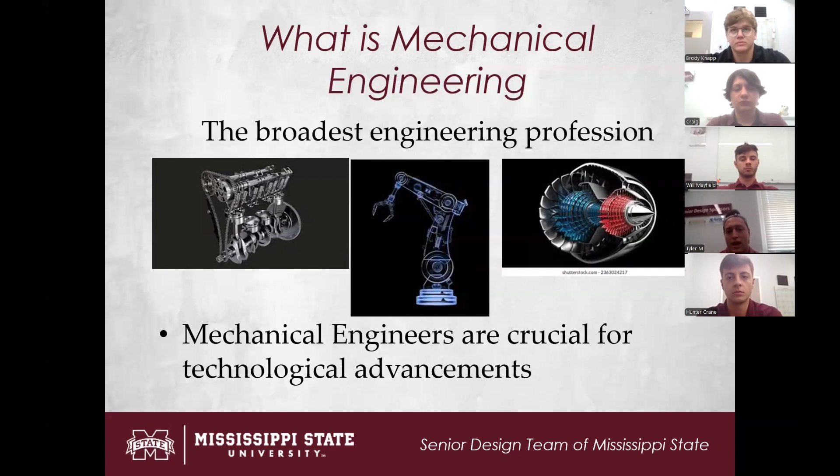So what is there to do with mechanical engineering? Specifically, it's going to focus on designing and CAD work, but there's also a lot of subcategories like manufacturing, robotics—which I know Brody told us that y'all love robotics, and that is something Mississippi State does offer. We have robotics classes available and a lab specialized for robotics. There's also testing, which is what I'm going into. We have maintenance, which is what Brody Knapp's going to be going into, and also energy systems, which my fellow Will is going to be going into.

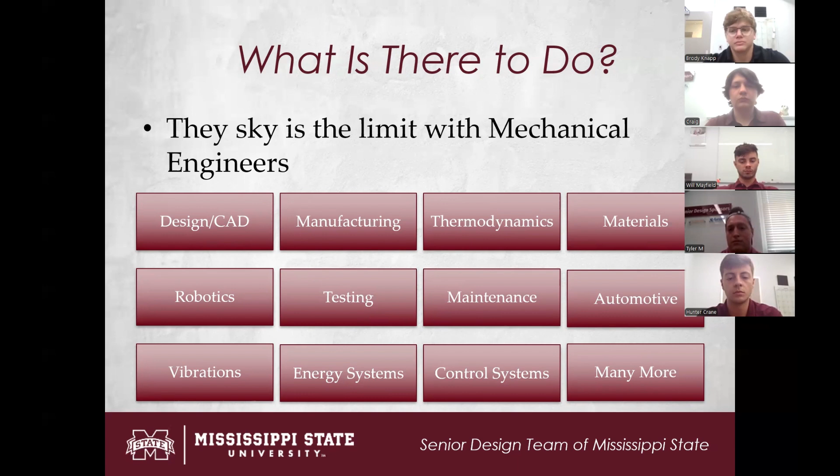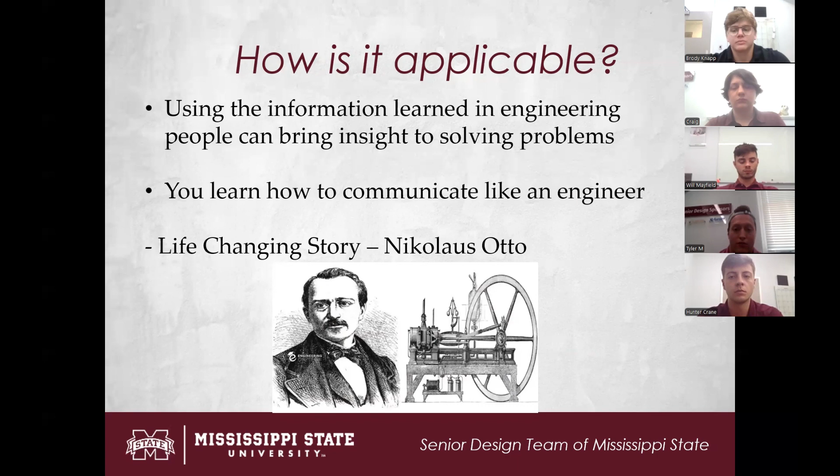How is it applicable? Well, using the information we learn in our coursework, people can bring insight into solving problems. You start to learn to communicate as an engineer and think like an engineer. A life-changing story is Nikolaus Otto, the inventor of the four-stroke Otto cycle, which is used in engines that we see in our vehicles every day.

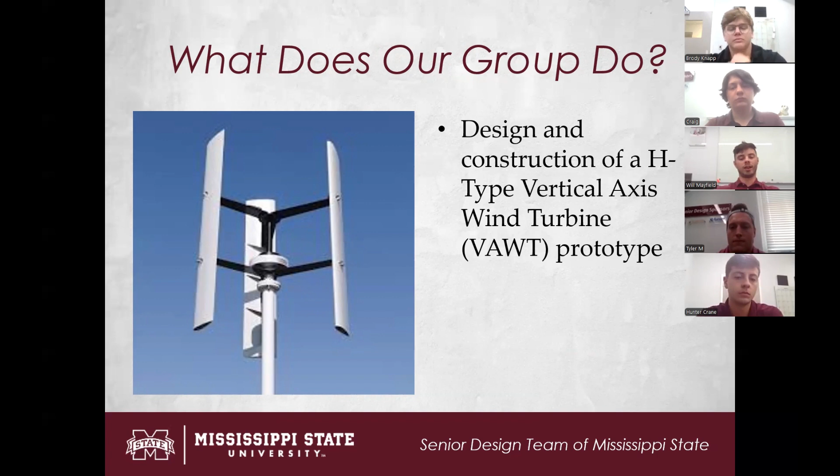So what are we doing? This semester, we were tasked with designing and constructing an H-type vertical axis wind turbine prototype. Our objectives were to build one capable of producing 300 watts of power for any given wind direction or condition. Our main goal was to determine if small-scale vertical axis wind turbine energy is a clean, reliable source.

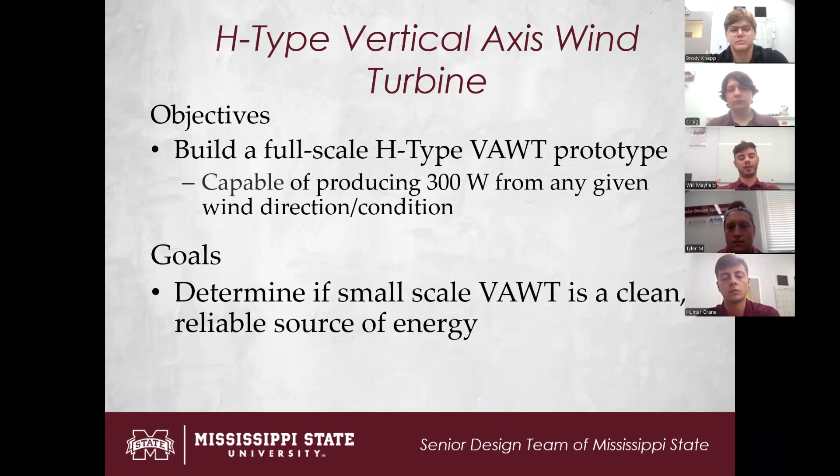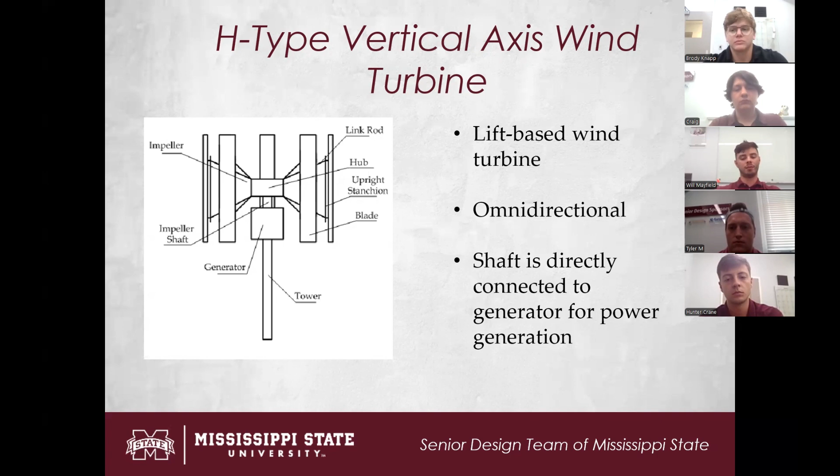So a little about our design. Our design is what's known as a lift-based wind turbine as opposed to a drag-based. These are omnidirectional, meaning they can generate power from any given wind direction. When the wind rotates the shaft due to lift forces, the shaft is directly connected to the generator for power generation.

In our case, we used a three-phase AC PMG, or permanent magnet generator, for power generation. For our airfoils, they're centered around a 6-foot long aluminum H-beam, with 10 NACA 0018 aluminum airfoil profiles secured to the H-beam using 3D printed brackets. There are also 3D printed brackets on the front and end of the airfoil so it can maintain its shape once it's wrapped in sailcloth, which you'll see in a minute.

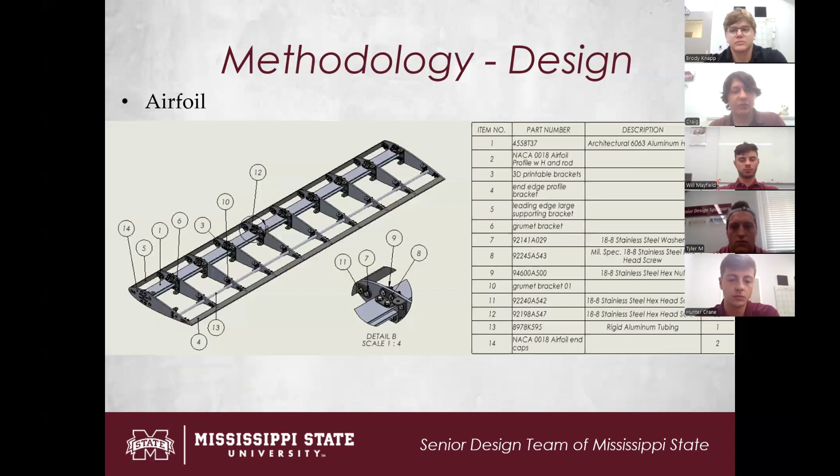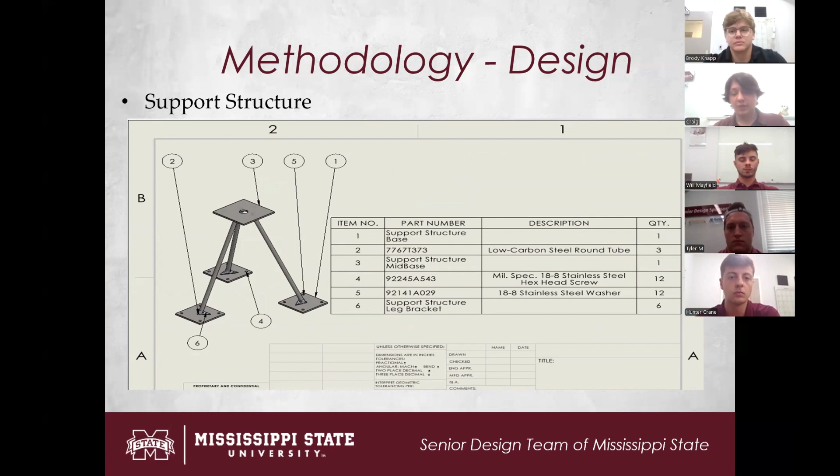For the bottom portion of the support structure, there are 3 base plates that go on the bottom, bolted to the ground through holes in the corners. There are 3 legs in a tripod configuration, angled at 70 degrees, that attach the bottom support plates to the mid base. Those legs are connected to the mid base and bottom base plates through custom brackets.

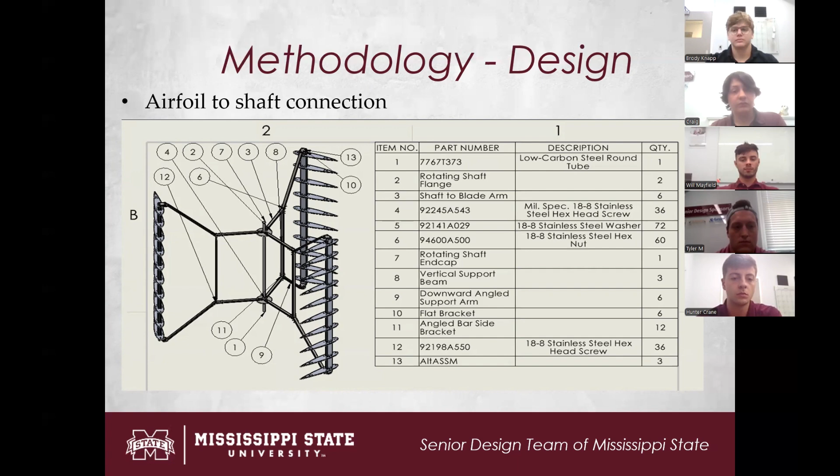For the airfoil shaft connection structure, there is a 6-foot long rotary shaft, 1-inch diameter, in the center. There are 2 circular flanges welded to that rotating shaft, and from those flanges, support arms come out at a 45-degree angle and are bolted to the top and bottom of the airfoils using custom brackets. There's also the bearing housing that the rotary shaft goes through, connected using clamping shaft collars. Inside that bearing housing are radial and thrust bearings, so our shaft can rotate freely without vibrations.

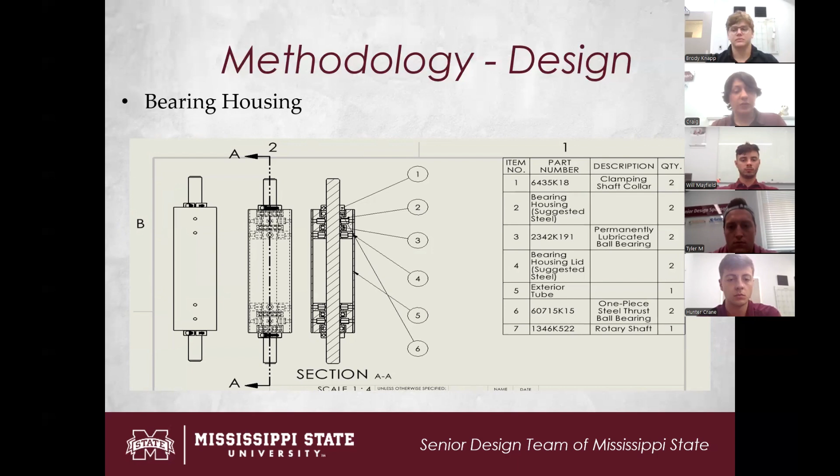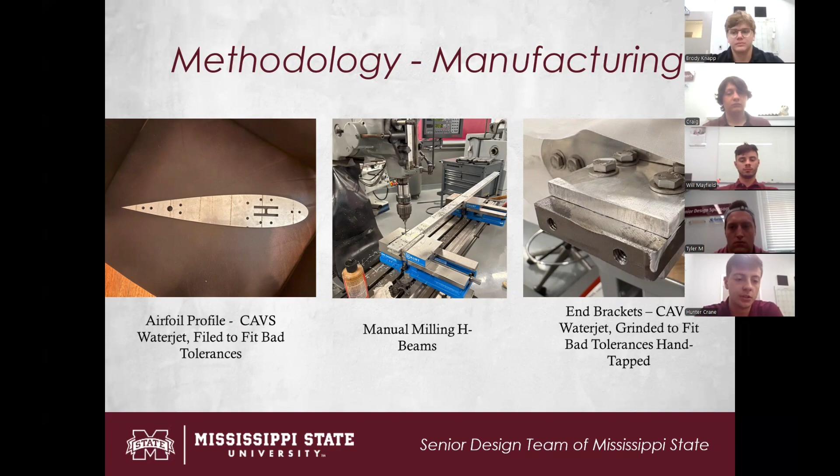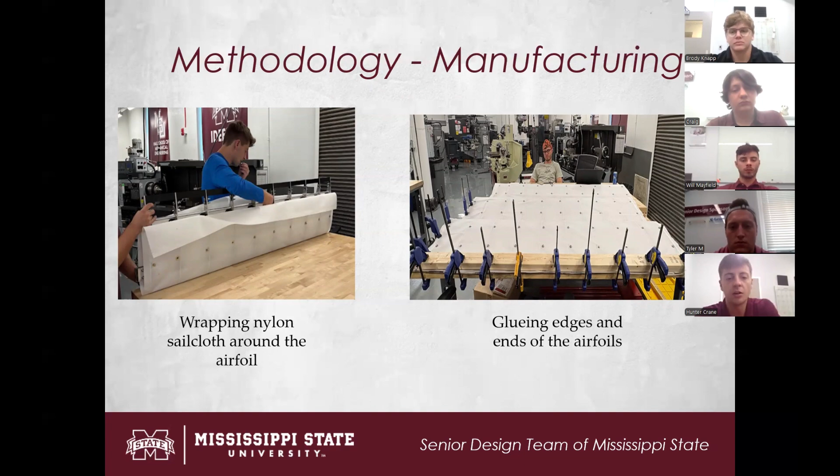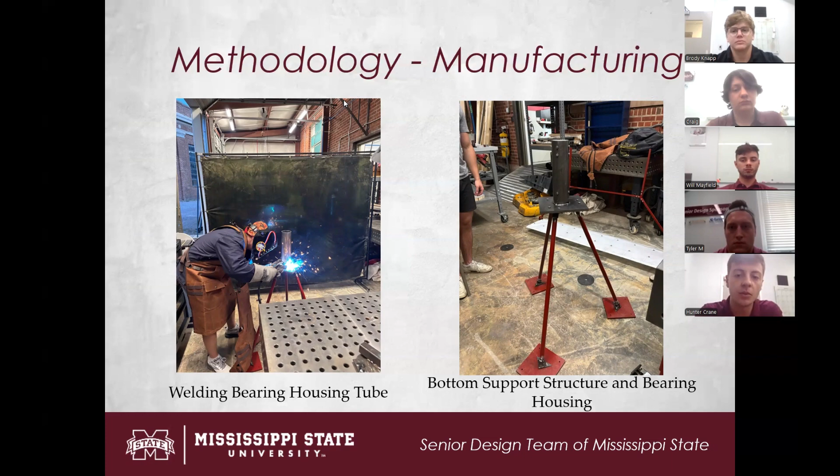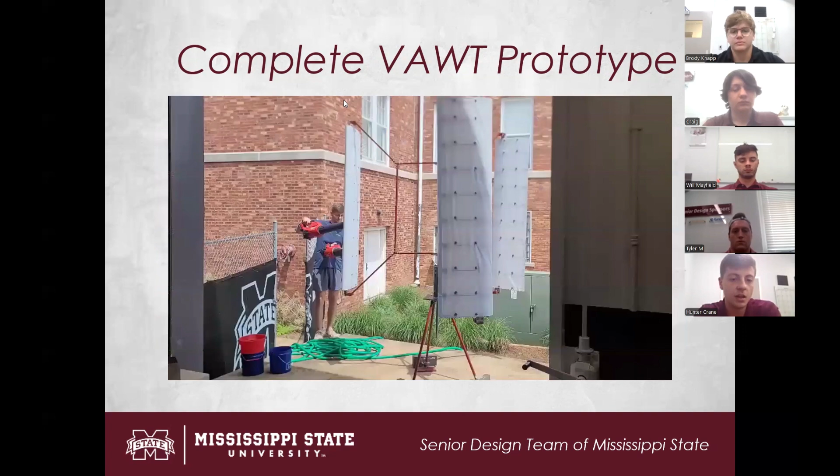For testing, in the next slide, you can see me using 2 leaf blowers, blowing the turbine to see if it self-starts, and it does have self-start capabilities.

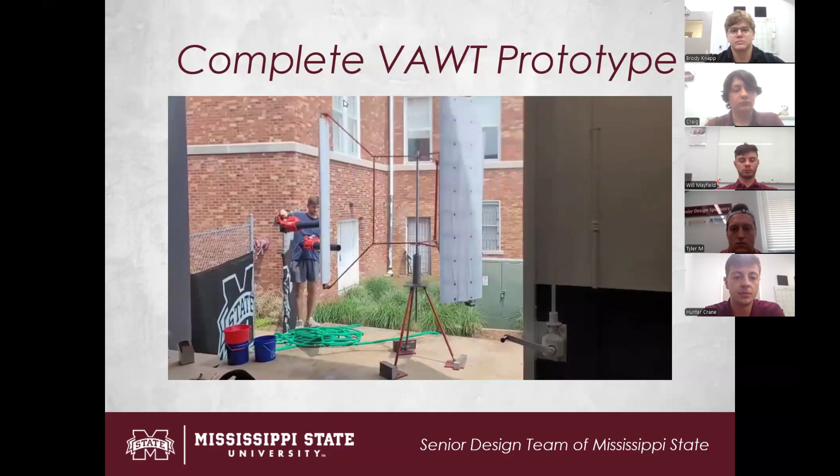So what does the vertical axis wind turbine help? This turbine allows for future research of these in rural areas on a smaller power grid. The hope is to be able to put these in areas where the power grid is already small and homes struggle to get electricity sometimes. So these turbines can be put straight into homes, and if the home has more energy than it needs, it can then be put back into the power grid as well.

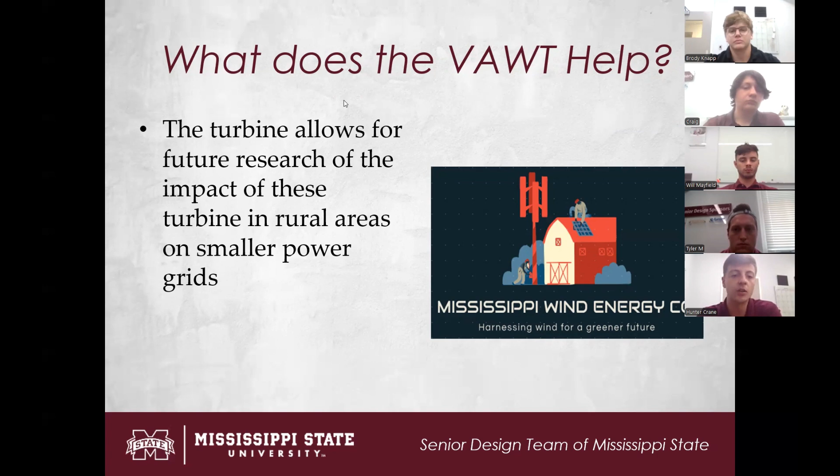So, why Mississippi State? Well, at Mississippi State, you get a fantastic education. It is a top 100 engineering school with over 30 industrial partnerships. So what this means is that throughout your time here, you're going to be involved in several projects, typically funded by these industrial partnerships. You get hands-on experience in about every field of mechanical engineering that you could imagine, whether that's through labs, projects, or group work presentations.

Additionally, there's a 98% job placement rate after 3 months post-graduation. This is excellent. It's very reflective of the quality of the education that you get here in Starkville.

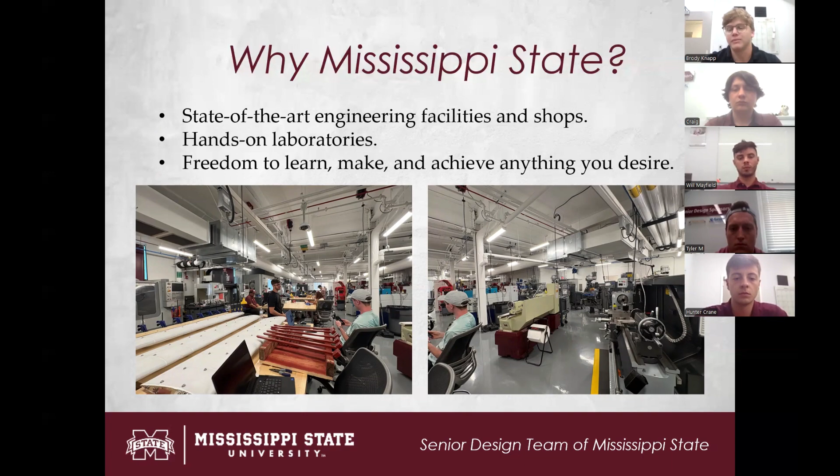On the right, you can see all the manual machines. So this is going to include your mills and your lathes and whatnot. So since you have access to all of these machines, you can make pretty much anything that you desire, given that you have proper funding. So the possibilities are endless here at Mississippi State.

Additionally, I know you guys like a lot of robotics. So you get some experience in circuits and programming, which is a further expansion on what you guys are passionate about in high school right now.

Outside of your core curriculum, there is a vast choice of technical electives that might pertain to your personal interests a little bit more. When I came to school, I was very excited about getting into automotive experience and stuff like that. But as I went through my time here, my interest shifted to something more along the lines of energy systems. So your interests are reflected in these technical electives. So that opportunity is there for you guys.

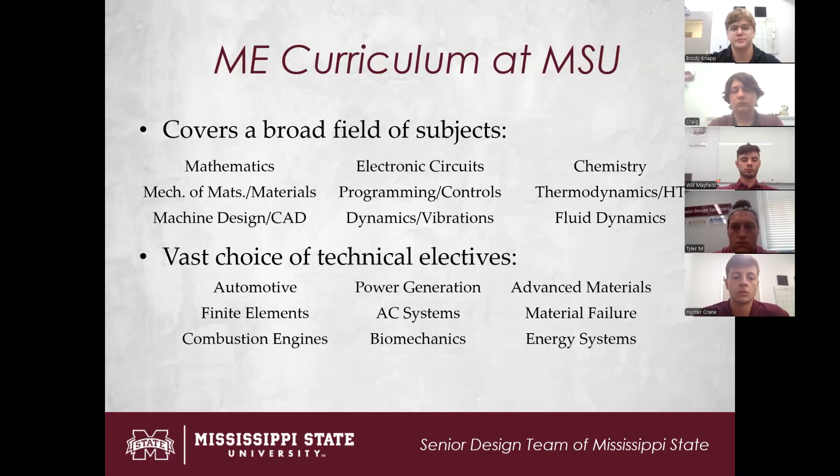So in conclusion, mechanical engineers drive the future of the world. They're involved in everything due to the broad application of what you'll learn. And Mississippi State does a fantastic job at preparing engineers for the future and ensuring that you will be an excellent engineer once you graduate.